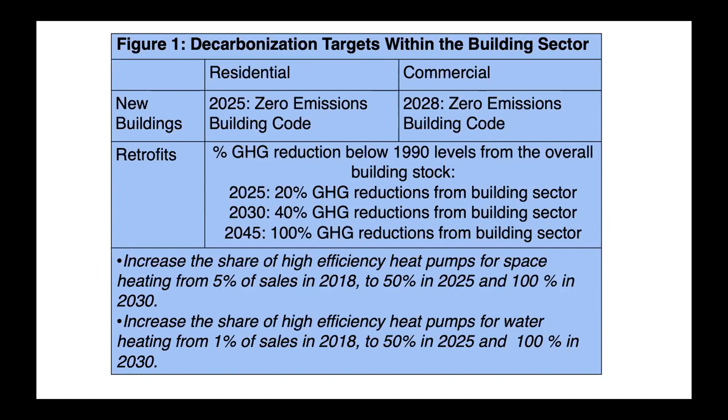We also called for a series of targets for heat pumps to move to 100% market share of sales by 2030. Below those numerical targets, we also had a series of less numerical, more driving goals that needed to be met if we were going to meet our targets. Those included increasing awareness of all stakeholders involved with building decarbonization, ensuring a good value proposition for customers and for contractors and installers, getting the supply chain up and ready to go, and aligning policies to meet all of our other goals.

This webinar series is related to that first one, increasing awareness. So we hold these webinars about every two weeks, where we bring in some of the top thinkers, disruptors, and doers within the building decarbonization space in order to present on the most recent research, products, and other activities going on.

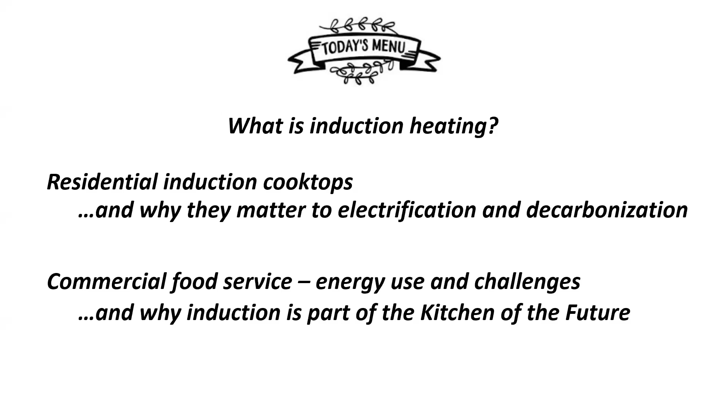Let's start with what is induction heating - I think this is important to review because it's something most people haven't come in contact with, physically seen, played with, or used. It's different from the way we have normally heated food in the past.

Here's a great graphic, thank you SMUD - I got this from Sherry Davis, who did a great poster and put this graphic together. If we look at the way a traditional gas range works, I have flames down here, some radiant heat hitting the bottom of the pan, and a lot of convective heat going up the sides, all trying to heat the pan, plus a little bit of conduction here between the elements. Basically, I am generating a field of heat and putting this cooking vessel, the pot or pan, right into that field of heat.

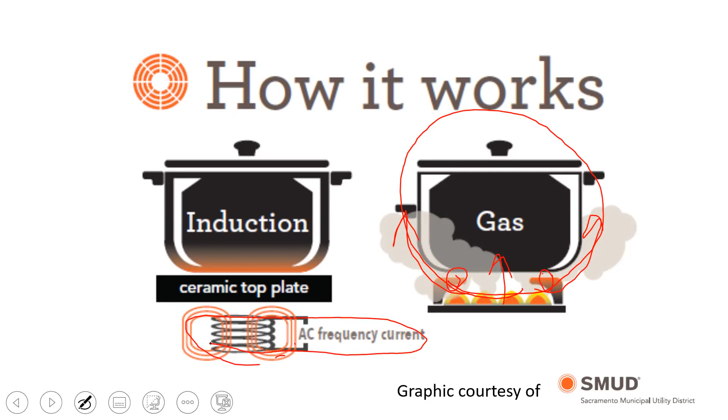Now, what we're doing with induction is we actually have a coil, a high frequency generator underneath a ceramic plate. It's isolated, and that is creating an electromagnetic field that rises above that plate. What the field is doing is interacting with the container itself, whatever the pot or pan is, and it is physically doing the heating in the pot or pan.

Okay, now I've got a lot of red lines there. But the most important thing to remember is that there is no physical heat coming off of the ceramic plate itself. I can turn on an induction cooktop all day long, have it on 11, and there will be no physical heat coming off of it. The interaction happens when I put this pot on top, and the electromagnetic field gets the electrons in that pot all excited, and they start running around and bumping into each other, and that pot heats up.

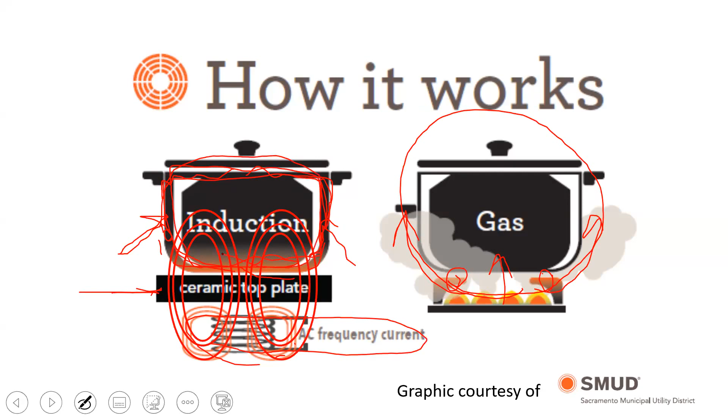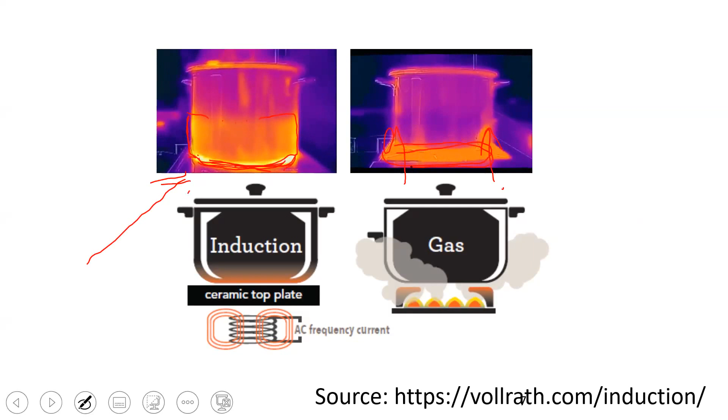Let's look at this nifty GIF from the Vollrath company, which makes commercial induction cooktops. On this side, here's the induction cooktop, and you can see how that induction field is evenly spread across the pan, with the field of highest intensity right at the bottom. Now on the gas cooktop, you can see how that convective heat comes up the side, and some of the radiant heat comes off the bottom here, heating the pot. I love this graphic.

Here's another great graphic that that Sherry at SMUD added to her poster, which we always love, once again illustrating the fact that the cooktop itself creates no heat. The heat is 100% created by the interaction of the electromagnetic field and whatever cooking container you put on top of that cooktop.

We love to do a fun demo around here. We'll have a pot of boiling water, and I'll take out a bill from my pocket—these days it tends to be like a $20 bill, I can't carry hundreds anymore, too many kids in college—and I'll physically put that bill sticking out underneath the pot as it's boiling water. People are like, 'Oh my God, you're going to destroy your $20 bill.' And then I pull it out and it's fine, because there is no heat being generated by the cooking surface, by the induction surface itself.

The surface will only ever get as hot as the pan. So if I'm boiling water at 212 degrees, then the surface will be 212 degrees. That's different from a traditional electric resistance range top or a gas range top, which has a surface temperature much, much higher. I could be boiling 212 degree water in the pan on a gas range top, but the burner itself may be at 300 or 400 degrees.

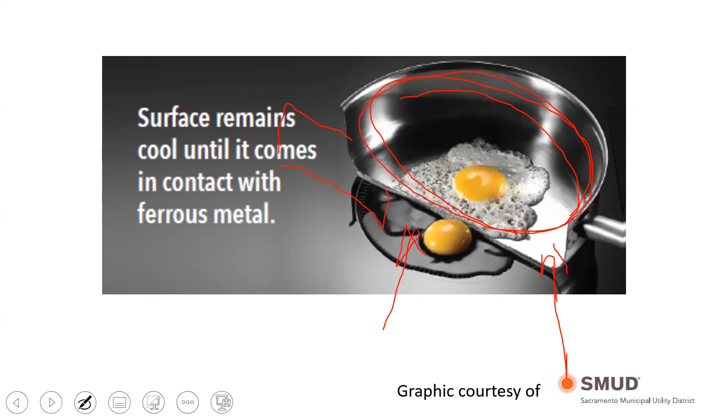Now, what are some of the benefits of induction? I'm just going to list these now because we'll come back to them in the commercial section. Basically, I'm looking at fast, flexible, modular, efficient, controllable, safer, easier to clean, and less heat released to the kitchen. We'll touch on all these things as we go along.

Now, some considerations for induction. It's a new technology, it has electronics in it, and it has a higher initial cost than what you'd pay for a standard coil electric range top, or even just an off-the-shelf gas range top. So there's a little bit of that.

And because it has electronics, will it last as long as the Wedgwood in my 100-year-old house? God knows how old my old Wedgwood gas range is—I was telling Panama I can't seem to kill it. It was probably put in in the 1950s. Would I be able to get 60, 70 years out of an induction cooktop? I'm going to say no, because it's electronics. But would I love to have the induction cooktop? Absolutely.

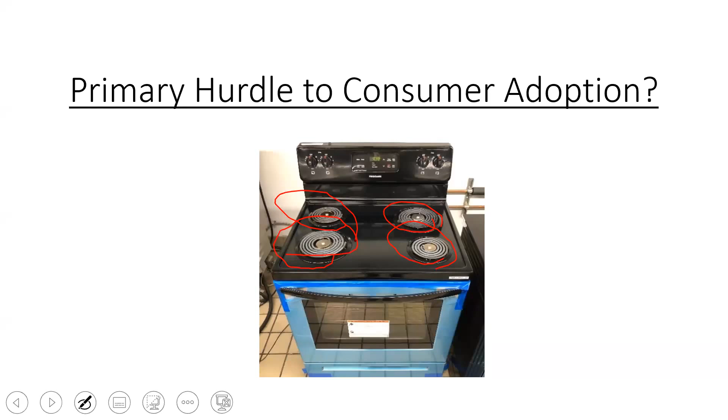It's always good to have data. That's our opinion. All right, Panama, can we move forward? We good?

Okay, so overcoming residential consumer concerns. How do we do that? We do that with science.

There was a great report funded by SMUD, thank you to SMUD, that we worked on here at Frontier Energy. Let's talk about this a little bit. The whole notion was to try and bring this equipment into the lab, get some numbers, and really see what's going on.

The report, by the way, thank you Panama and the Building Decarbonization Coalition, is posted at the same place where you registered for today's class. You can pull that report down and have a look at it.

So the notion was to get in and look at performance. The thing that I think most people care about is how the induction range top compares when it comes to heating things up. You could say, well, induction cooks your food twice as fast. What we really are looking at is production capacity and practical uses of the induction versus the gas range.

Okay, so let's look at some answers here. What do we got going? Well, on my red side here, sorry, I should be using my finger instead of my fancy pen.

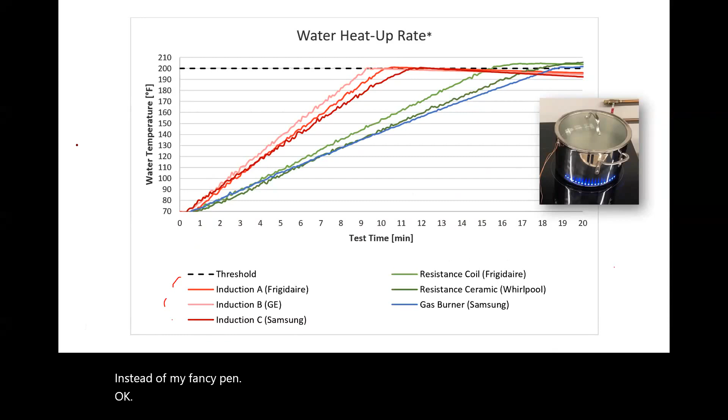Okay, oops. Okay guys, I'm having a tech morning. Let's just restart this slide here. There we go, alright, maybe I'll use, there we go.

Okay, let's see if we can make this work again. So on the left side here, I've got my induction cooktops, and I start them off at 70 degrees.

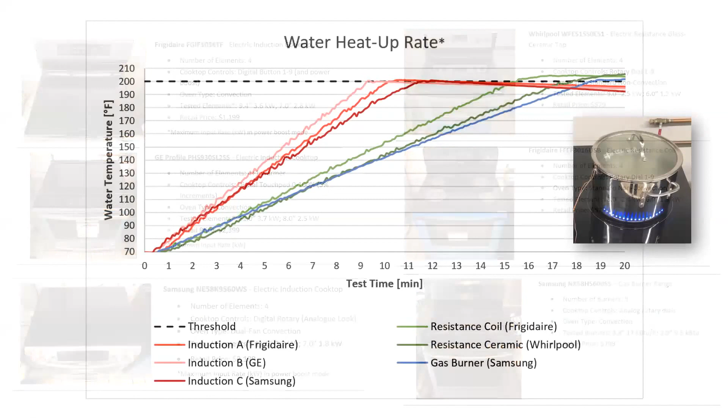Okay, there we go. Start them off at 70 degrees, and I'm up to 200 degrees right up here, somewhere around 10 minutes, an average of about 10 minutes, okay? That's great. And at that point, a couple minutes later, my water's boiling, and then I'm gonna cook my noodles. It's gonna take the same amount of time to cook my noodles in that boiling water, regardless of the type of range top I'm using. What I really care the most about is how quickly can I get that water up to temperature.

Over here in green, these guys are my electric resistance range tops, and then here's my gas burner in blue. If you look, I'm crossing the line. What I really want to compare today is my induction cooktops against my gas range top.

And here I am, and it's taken me about 18, 18 and a half minutes, something like that, to reach that 200 degrees. Last night when my very hungry kids were complaining about me not cooking dinner fast enough because I was working on this presentation, what did I want to choose? I would choose that faster 10-minute heat up rate. That's a lot of time - that's basically doubling my production. Let's look at this from a number.

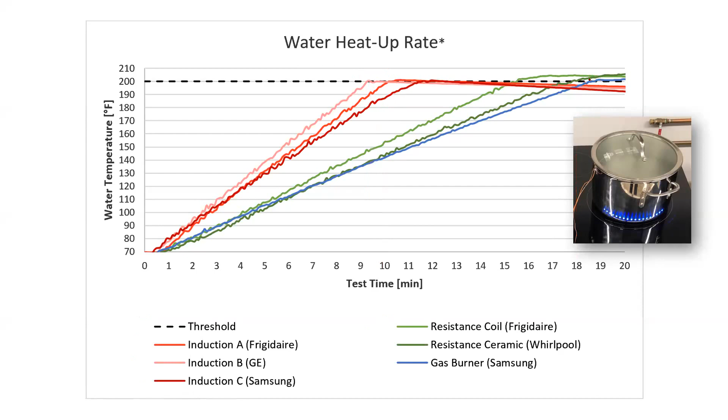And once again, I hate to show charts, but this is a great one. It's in the report, just want to show a couple of things here. So here we have all of our input rates for the various range tops. So here's my gas range top - it is at 17,000 BTU per hour. And my induction range tops here, they're all listed in kW.

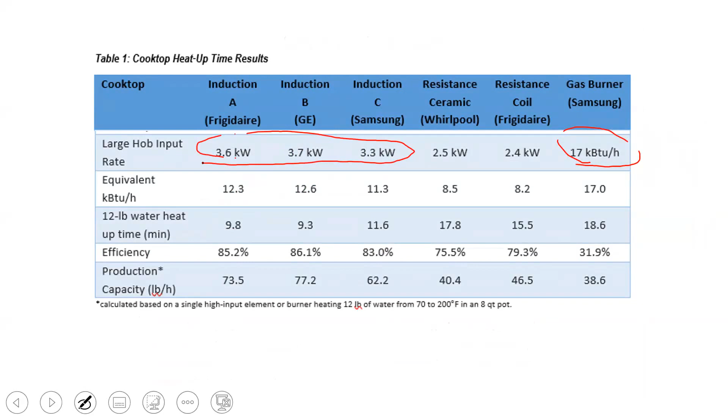So Sherry Davis over at SMUD had a great idea. She said, Richard, I would like to know equivalent BTUs. So we converted everything over to thousands of BTU per hour. Now I can compare my gas range top, 17,000 BTU per hour, to my induction, which is averaging out at about 12,000 BTU per hour. So you would say, wow Richard, there's less BTU per hour coming out of the induction. What's going on there? Wouldn't it be slower?

And in fact, here are those times. There was the heat up time for the gas at about 18 minutes. Here's the heat up time for the induction - it's averaging out at about 10 minutes. That's pretty amazing. Why is the induction moving so much faster than that gas range top?

And it really comes down to efficiency. The induction, because the induction range top is not creating any excess heat, all of the energy is really going into the pot or pan. So we have very high efficiencies up in the 80% range. Whereas with my gas range top, just by design, it's a much simpler burner design, a much simpler heat transfer, and I'm at, you know, down around 32%.

So what does that mean from a production capacity, how many pounds? Well, I've had times when I've had all my kids and all their friends over at the house, and I'm trying to really cook a lot of pasta then. What does that mean? Well, I can get 73.5 pounds of water up to temperature in an hour on my induction cooktop versus 38 pounds per hour. That just lays it out - there's a lot more capacity in that induction cooktop.

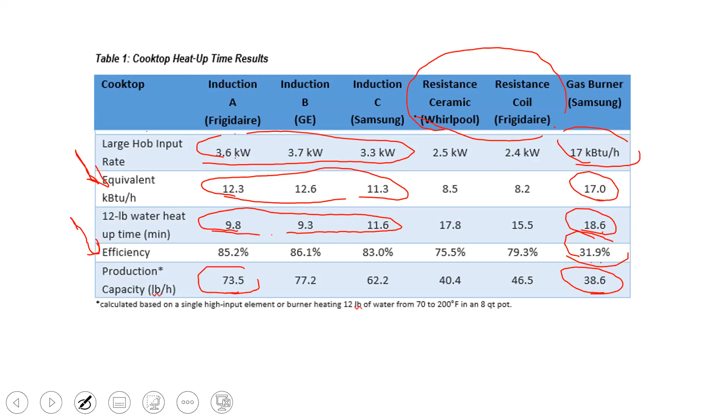Now I want to point out one other important thing. If you look at our traditional resistance coil cooktops, you'll notice that they have elements rated in the 2.5 to 2.4, or around 2.5 kW, okay? How come I can get these induction elements so much higher, the induction hob so much higher? I think this is a really important feature that we need to pay attention to with really good residential induction cooktops. The beauty of the induction cooktops is they have electronics and computer control.

They're smart appliances, and each one of the ones that we tested actually had a power boost mode or high input rate mode. So those three hobs can actually go up to a much higher kW. And that's really brilliant, because what it means is that I can put as much energy as possible into those bigger hobs, and really get a lot of water heated up without having to put a much bigger electrical panel on the side of my house. In other words, I could replace these resistance range tops with the induction range top and put it on the same exact circuit.

Now, so then you're going to be like, well Richard, these induction range tops have higher ratings - what happens when you turn them all on? Isn't that going to overload the circuit?

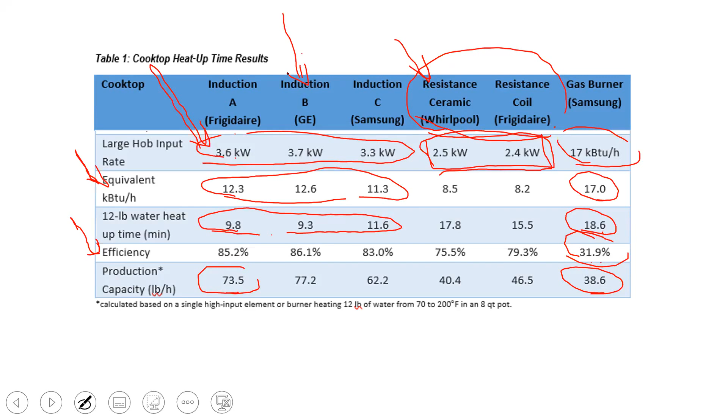The beauty of induction range tops is that as you turn on more of the induction hobs on those units, they communicate that another one is coming on, and they start to back down their power so the range top still stays within its breaker rating, its current rating. It's something you cannot do with a regular resistance coil range top, and I think it's a huge feature on these nice induction cooktops.

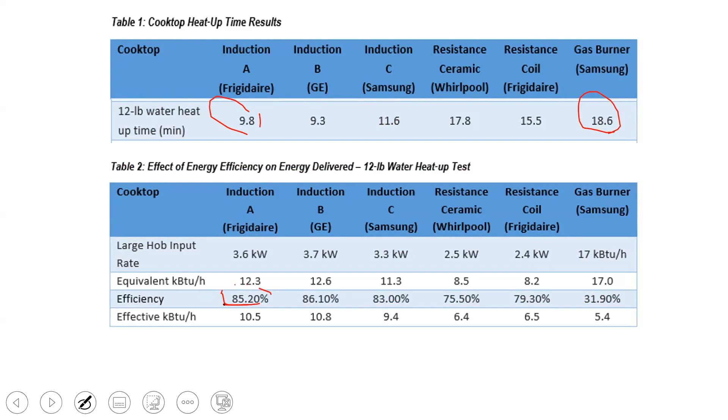Okay, let's look over here. Once again, I've got my chart. We've got our heat up times, 18 minutes, 9 minutes, and then we get down to our efficiencies. Remember, I got that much faster heat up time because I had 85% efficiency versus 30% efficiency.

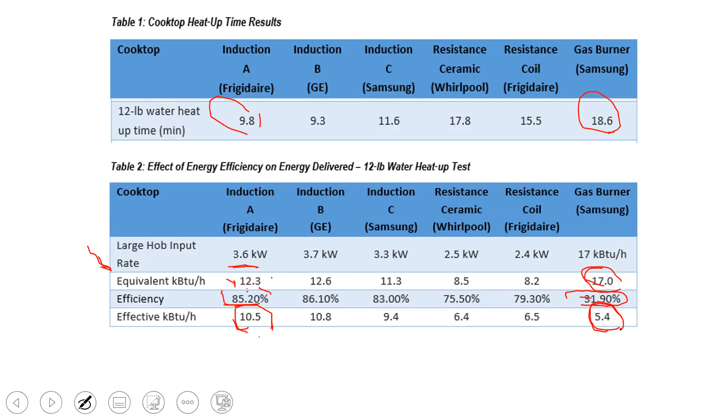Sherry at SMUD was like, Richard, what's the theory there? Tell me what's going on. So we said, let's go back to our equivalent BTUs. My induction range top, take this first example, has an equivalent BTU of about 12.3. When I multiply that times my 85% efficiency, I get an effective BTU delivered to the water of about 10,000 BTU per hour. On my gas range top, I have that much higher 17,000 BTU per hour coming through the burner, but my efficiency is only 30%, and I end up with an effective energy delivered to the water of about 5,000 BTU per hour. So that explains what's going on. It really comes down to the ability of the induction range top to effectively deliver heat where it's needed.

Okay, let's move on to my next story. You know about me making pasta for the kids, all that good stuff. Lately my wife and I have also been doing something with our beautiful fig tree out in the backyard—we live in Oakland, the greatest city on the planet, thank you very much. We've figured out we can make fig preserves that will take us all the way through the winter, so we've been learning how to do preserves.

So one day we were doing them on our gas range in the house, but another time we took all our fixings and went out to my mother-in-law's house, who has a resistance ceramic electric range. We started making the jam out there, and damned if we didn't burn it. The bottom of the pan was scorched, and I'm such a careful guy, so I wondered what happened there.

What happened is that when you turn off the heat on an induction range top, or on a regular gas range top, the heat's off—there's a little residual heat, but it basically stops inputting any extra heat, and you have some controllability. On those traditional resistance range tops, particularly ones with a ceramic top, they build up a lot of stored heat in the coil or the glass cooktop, and they actually overshoot that temperature.

In our test, when we were taking the water up to 200 degrees, we would turn off the cooktop at 200 degrees and then see how much the temperature continued to rise. Here's why I burned the jam: on that ceramic cooktop, the temperature rose another 7 degrees. Anybody who's made jam knows you have to really keep an eye on that final temperature—you don't want it to scorch. It's a time and temperature kind of deal. And the other problem was, not only does it go 7 degrees above temperature, it takes a long time to give up that residual heat. There's like 38 minutes that it will sit above 190 degrees.

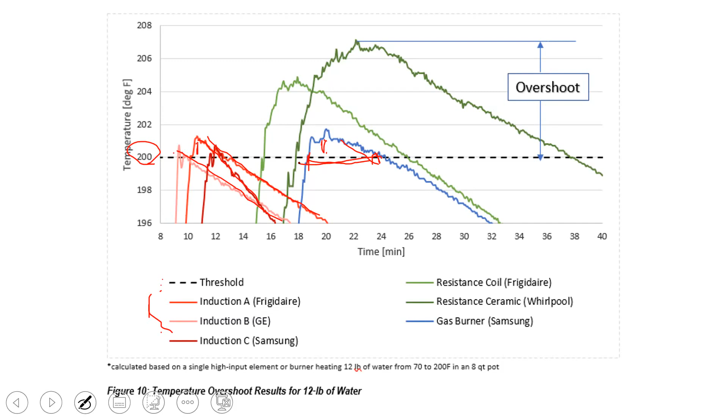Check it out, here's the one I was just talking about, that resistance cooktop. You can see my overshoot, it really goes up pretty far, and then it stays up there for a long time. It's above 200 degrees for a long time. In our test, we waited for it to get all the way down to 190, and that's where it took that 38 minutes.

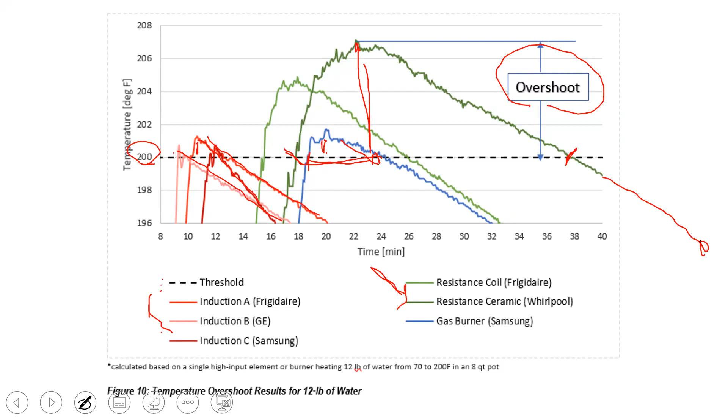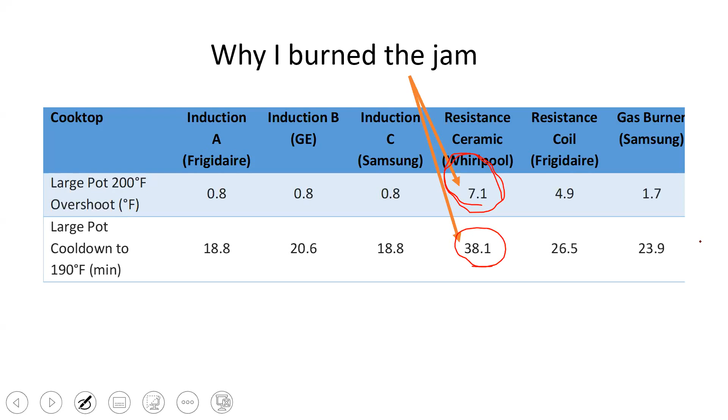That's one of those performance issues that makes induction great. Now there's another part of this that's pretty important, the safety aspect. If something stays hot for 38 minutes, you're saying, hey kids, stay away, don't put a rag on it, don't put your hand down on it. There's just that chance somebody's going to walk up and get burned. Whereas the induction is back down to temperature pretty quickly. So I just put that in as an extra benefit.

Now, how do we get people to understand all of this stuff? Because I can talk theory all day and show you charts, and right about now you're having your second espresso, thinking why did they get an engineer to talk about this? What we need is hands-on. Hands-on changes hearts and minds.

I think this is our goal. Ultimately we have to get people hands-on using this equipment. This is what's going to change hearts and minds above everything else we try to do. I know a lot of people on the line, a lot of people we're working with, are doing loaner programs, and I think they're great because that gets people understanding this induction technology is different, it actually works, and it's very simple to clean. It's all great stuff.

But the thing I want to continue to point out is that this little loaner single hob induction cooktop is way different from that very nice, full-on range top that we did our test on, primarily because the little loaner does not have that power boost unit, and it's limited by the current that can come in. It also may have a fan on it that makes it a little bit noisy, that's one of the complaints people have talked to me about, they can hear it, whereas the big range also has heat control but it's spread out, you're not hearing it, it's not so focused.

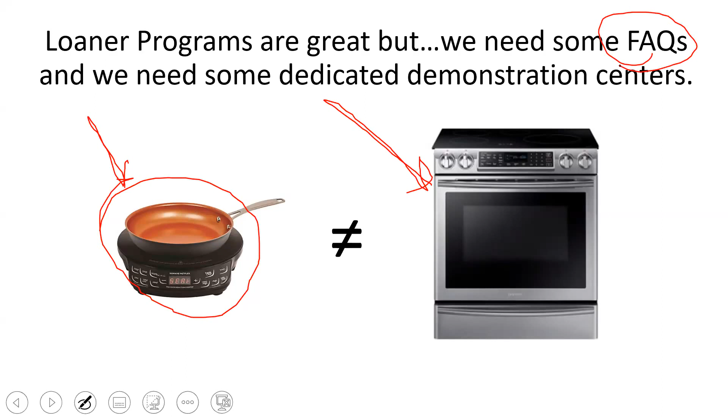So I think what we need to do for these loaner programs, here's another invitation, we need to create some FAQs. As we loan these things out, I think we need to be telling people, hey, this is just a little taste, but you guys really should come in and try the bigger stuff.

I also want to talk about this for a moment. We need to get on point about why induction range tops are crucial to decarbonization. There's some articles saying, hey, it's just great, great for you, performance, blah blah blah. But I think what we really need to do is go back, and I went back and looked at the New York Times article. It was an interesting article that got a lot of negative comments, sadly, from readers, like 700 comments, and about 500 were negative. But I think that's because people didn't really read a couple of the important lines in there, and I think we as promoters of the technology need to pay attention to this.

So here's one of the lines: nobody is going to shed a tear about having to switch to a more efficient furnace or water heater, but people feel emotional about gas stoves.

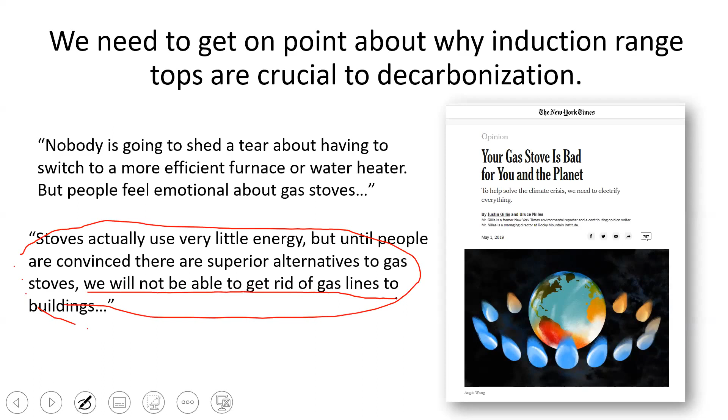Stoves actually use very little energy, but until people are convinced there are superior alternatives to gas stoves, we will not be able to get rid of gas lines to buildings. This is the core, right? We're really trying to change hearts and minds so that you could get rid of that gas line to the building. So I just want to pitch that out there.

I think we need to really make sure that we're on point as we do our communications. I've seen a couple of communications that actually produce more blowback from consumers than positive movement.

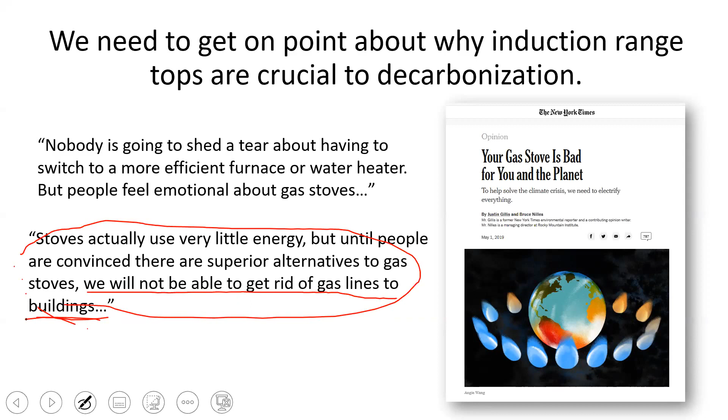I also want to say I think we need to sell induction range tops in the same way as people sold smartphones. I'm old enough to remember when I had one big black phone that sat in the house tied to the wall, and now I've got this incredible computer in my pocket, and I think that's where we need to go. We need to tell people, hey, the induction cooktop is like your smartphone. It does amazing things that the old, 19th century technology doesn't do.

So let's talk a little bit about commercial food service, which is near and dear to our hearts. And we want to talk a moment about energy use intensity. Why do we care about food service?

So this is thousands of BTU per square foot. Let's fire up my pen again here. There we go. I'm sorry guys, I have a new computer and I'm still getting used to the touch screen and all the fun stuff I can do. It's slightly different from my last one, so I'll blame my faux pas on still learning the technology.

Okay, so anyway, here we are. We're talking about thousands of BTU per square foot. That's an energy use intensity number. Any of you energy experts out there deal with this all the time. If you look at commercial food service, it's running at about 350 kBTU per square foot. Okay, here's my restaurant over here.

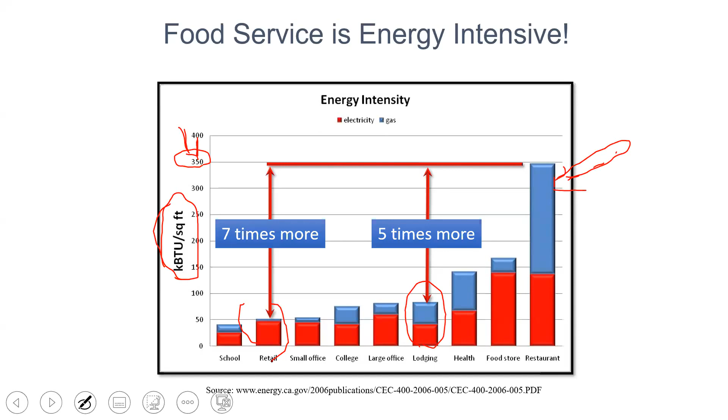Now that's an average number for food service. You compare that against a hotel, it's 5 times more. Against normal retail, it's 7 times more. If this restaurant is a quick service restaurant or anything with more kitchen to it, that 350 energy use intensity number goes way up, okay?

What that means is that you're driving down the street and you see a McDonald's next to a Best Buy, and your brain is going to say, hey, that Best Buy uses a lot more energy, and in fact, they could be using the same amount of energy. They could have the same energy bill.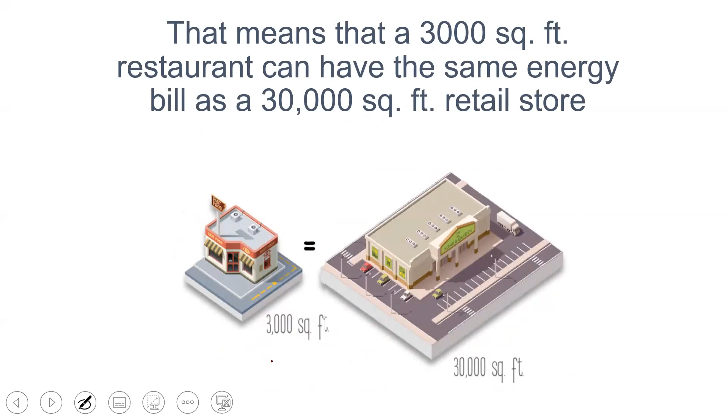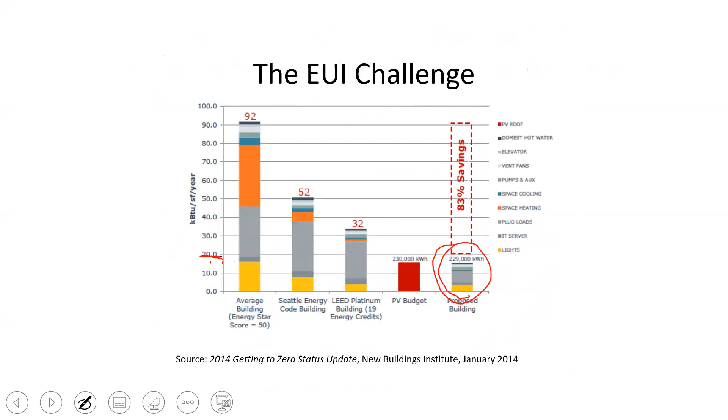What does this say for us when it comes down to green building stuff? Well, let's say we were going to try to get to a zero net energy building like the Bullitt building here, and now we're trying to get down into 18 kBTU per square foot, okay? I wonder if I can do that in food service.

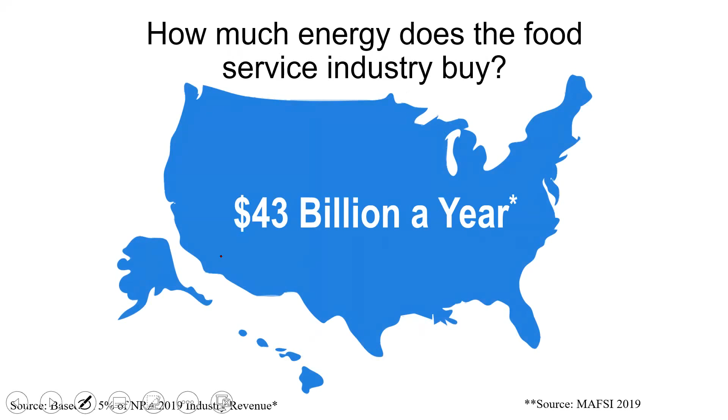From a cost standpoint, commercial food service operators are buying about $43 billion worth of energy a year. Compare that to all of the equipment supply, tabletop, furniture, everything, that's about $13 billion a year. So the energy bill is way more than all of the stuff you see when you walk into a restaurant, all the hardware. It's a big energy bill.

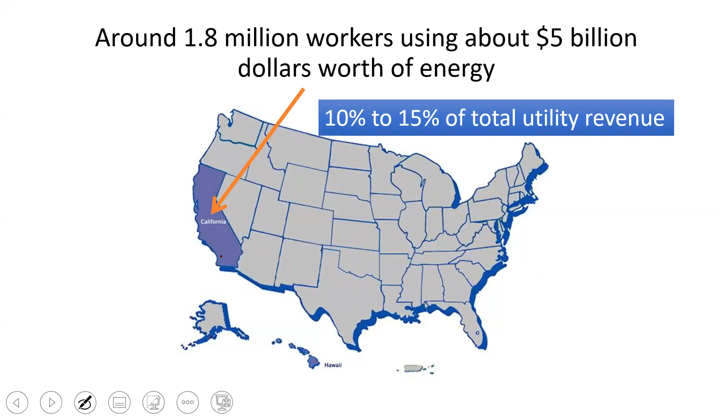In California, that's about $5 billion worth of energy, and it's 10 to 15% of the total utility revenue. Any utility people on the line out there? I'm just going to repeat that, okay? Your commercial food service customers are 10 to 15% of your total utility revenue. And so it's very important to look at this market and take care of this customer segment.

From a social standpoint, about 10% of the US workforce is in commercial food service. And basically, everybody's touched by food service every day, okay?

And there's some major challenges facing our food service operators right now. Probably labor being the biggest one. Anybody in the Bay Area knows that every restaurant's got a sign on the door saying, hey, help wanted, or lots of them are closing because they can't get enough people.

Real estate, the cost of real estate is way up. We need to do ever more cooking in ever smaller spaces. The kitchen environment is pretty brutal. Nobody necessarily enjoys working in high temperature situations, and there are actually some new heat stress regulations coming down the line. And then of course, electrification, decarbonization, that's sort of confusing to people, and it could actually change the amount of money that it costs to operate a restaurant.

The good news is induction is definitely a solution to some of these challenges. And so now let's get into that. What are some of the things? Well, induction is fast. Hey, that helps with the labor. It's flexible. I can put it in all different kinds of situations, so I can build a smaller kitchen. It's modular. I can just install as much induction as I want.

Highly efficient, that helps to lower my bills. It's very controllable, that helps to cut my food waste. It's way safer. It's also easier to clean, so that keeps my workers' comp down. It keeps my employee safety up. And at the end of the night, you wipe the thing down and you're not taking it all apart and trying to clean up burners. And there's less heat released to the kitchen as well.

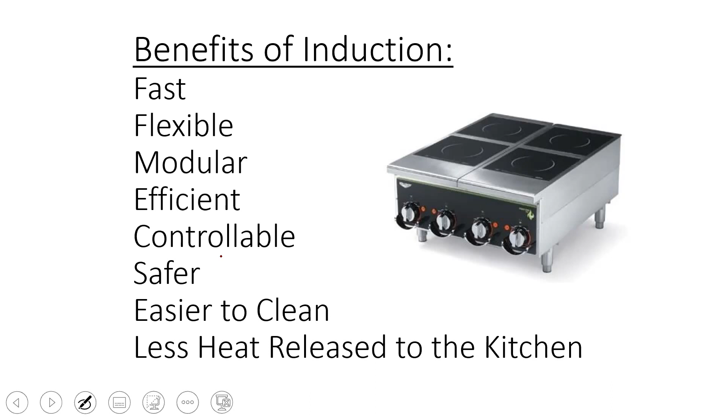There's a lot of different form factors in induction these days, which is great. These are some of the ones we've had in the lab, and lots of interesting stuff, like their tabletop units, their standalone units, their drop-in units, their stock pot ranges now.

And then there's woks, and this was one of the questions somebody just asked. Let's go back 25 years to some energy work we did on some woks. This one, that's a 5 kW induction wok right there. 5 kW induction wok, with very high efficiency, and I can produce 117 pounds per hour of food. Here's the traditional wok, and its efficiency is so low that it's producing about 124 pounds per hour. These guys are pretty close, right? Even though in size they're way different.

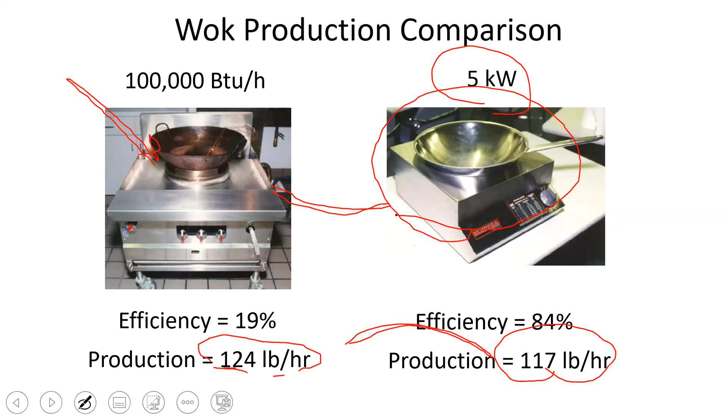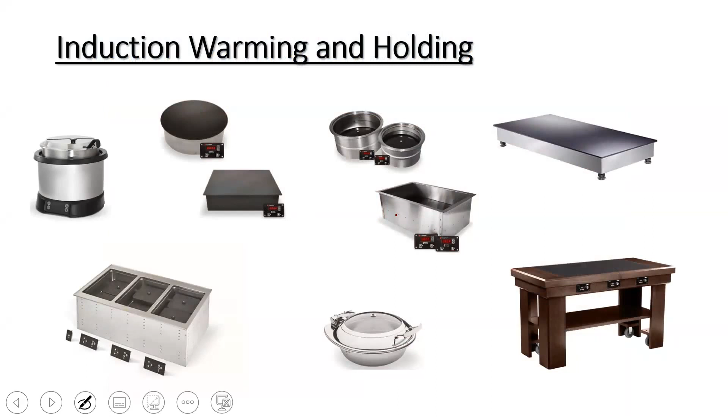So what's been the challenge of these woks? People will say, well, that's not a true Chinese wok. It doesn't look like something they would use in China. Amazingly enough, I did see these in China when I was over there, but I can understand that. I can understand people saying they really want an induction wok to look like a real wok. Well, hey, good news. At the National Restaurant Association show this year, they were showing off a full-on Chinese wok, so it's coming to the U.S. market. And then on top of that, there's all kinds of cool gizmos you can get for warming and holding and all this good stuff.

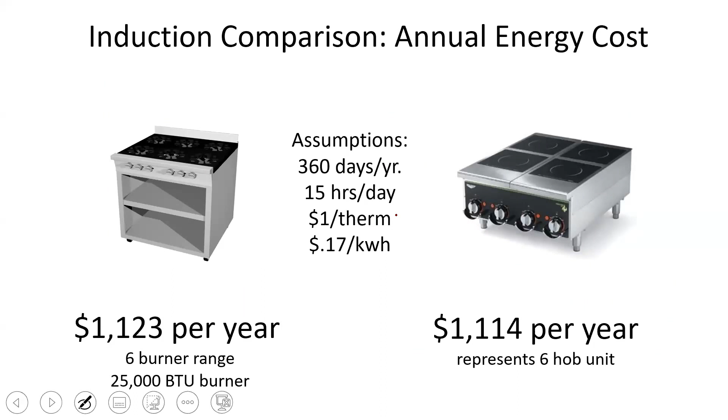So let's do a quick comparison of a couple of range tops. Here's a gas range top from a case study that we did, and we did a cost analysis, and that was about $1,000 a year to operate. And the same size, the 6-burner induction, would also be about $1,000 a year to operate. So no big cost increase to go all electric with induction, which is great. That's not true for every appliance, but that does work for the induction range top.

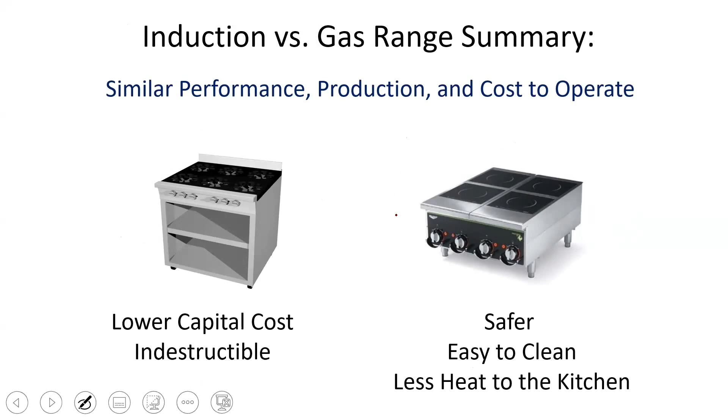So what are some of the benefits? Well, if I'm looking at a gas range top, what are the benefits with that? It's a lower capital cost, and it is indestructible. Somebody asked me one time, how long will a commercial gas range top last? And I said, 1,000 years. But on the plus side of the induction, it is, once again, safer, easier to clean, and less heat to the kitchen. It cuts some of that heat out, which is really important.

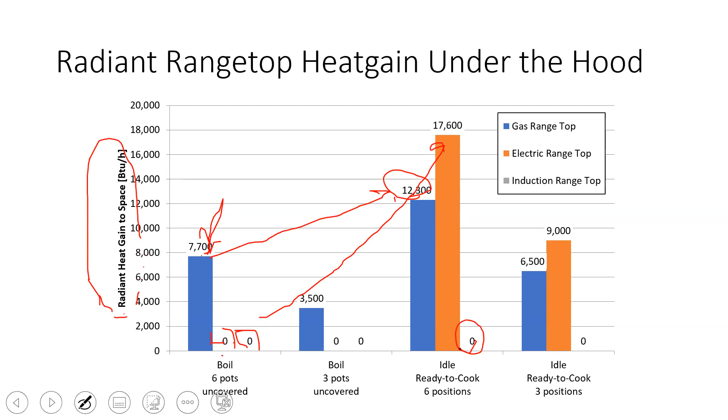Now, here's the interesting thing. If I take the water off and I just have the burners turned on - everybody's probably been to a restaurant and seen a gas range with all the burners turned on - I have this much radiant heat gain in the space. It actually goes up. And if I take the pots off of the electric one, look at that. It goes from 0 way high up to 17,000 BTU per hour. But look at there, the induction, of course, still stays at 0 heat gain, because when I take the pots off the induction cooktop, it uses no energy, it produces no heat. So once again, ancillary benefits.

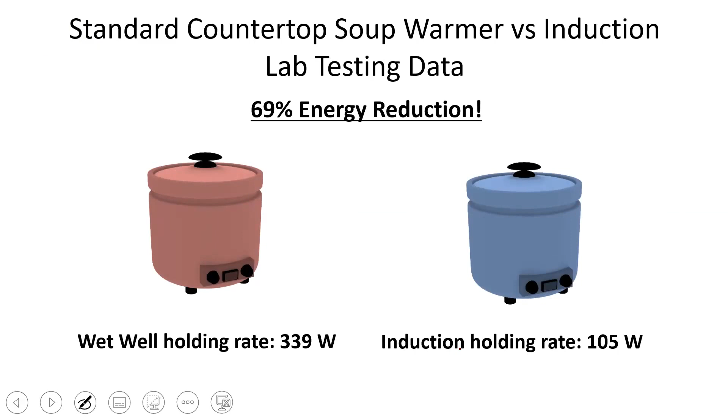Let's look at a couple of pieces of equipment, data that came out of a CEC study. We looked at soup warmers. In the lab, we saw a 69% energy reduction for induction soup warmers. In the field, we were seeing 64%, right?

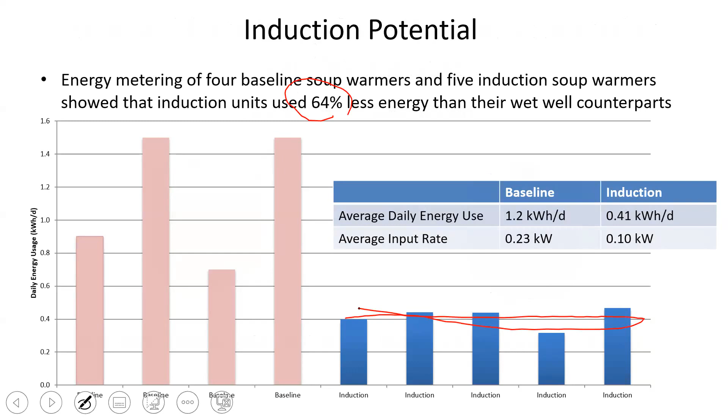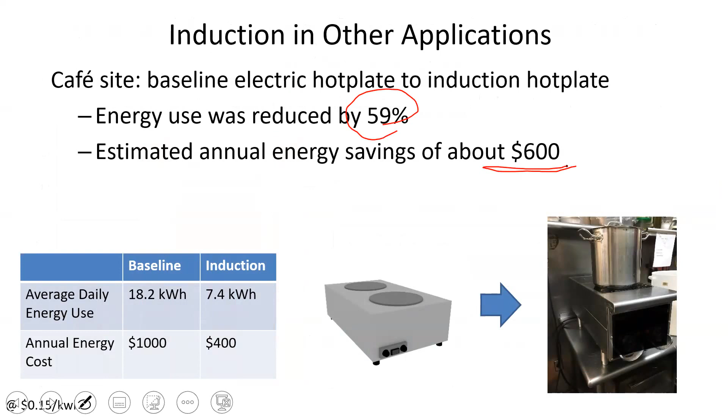Here is a little restaurant in Oakland where we replaced a hot plate with an induction unit, cut energy use by 59%. That was savings to this small business of $600 a year, which I guarantee you is a lot. We always ask chefs, what could you do with $600 a year?

Here's some not so good news I want to pitch in, a little sidebar about going all electric. Electric appliances can cost significantly more to operate, so we need to design smart in order to achieve decarbonization.

This is an invitation to anybody out there doing a job to come contact us at the Food Service Technology Center, work with us on the front end. If you do a one-for-one replacement of gas with electric, you're going to end up with higher utility bills. This is also an invitation for folks in the municipal sector working on codes and laws. We need to look specifically at food service and make sure you do not negatively impact your food service customers.

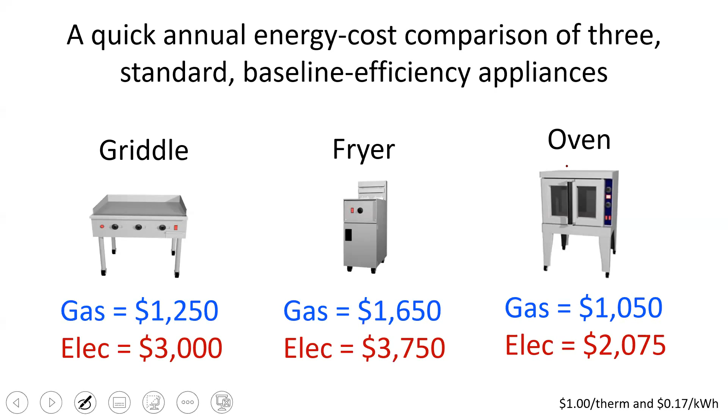The way around that is to design smart so we need less equipment, and lower the overall energy use of the entire facility. That could be looking at your hot water systems, your kitchen ventilation, making your kitchen smaller. Ultimately, this is what we're trying to do.

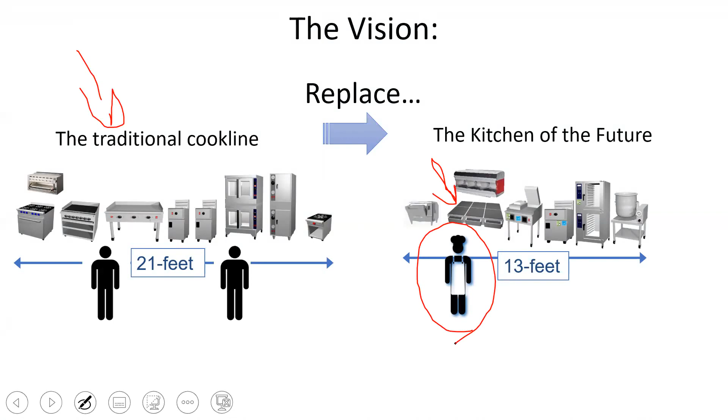We're trying to replace a really big traditional cook line where you've got one of everything and a bunch of low-paid staff working on it. We want to move to a much smaller cook line that uses a lot of high-tech equipment like the induction cooktop, and has highly paid, highly trained professionals running all the equipment. That's one of our big visions and goals here at the Food Service Technology Center.

Now, the tools to get it done. How are we going to change hearts and minds? Do we have this in our hands? Well, we do. Here at the center we have a demonstration facility where we can bring people in and get hands-on.

I know people are doing loaner programs for residential. I think in residential we really need to set up some centers where we can set up real residential ranges and have people come in and work with a chef.

This guy right here, Mark Dusler, is our consulting chef. He knows his stuff, he's really excellent. The quality of food and eating around this lab has gone up tremendously since Mark has been here. And it does not cost PG&E customers a penny to come in and demo this equipment.

So let me give you a great example of how that worked. Peter Turnbull over at PG&E, a friend of ours for many years, said to Panama, 'you need to go out and meet these guys at the Food Service Technology Center.' Panama came out, we sat down together, we hit it off wonderfully, and shortly thereafter Panama told a sustainability manager in Fremont, 'you need to talk to these guys at the Food Service Technology Center.' It just so happened they were trying to build a senior center, and trying to get their chef to consider induction cooking, electrification, and high efficiency equipment.

The chef came out, worked with Mark Dusler, tried out some equipment, and this is what he said after getting his hands on it: 'After the presentation and testing some of the equipment, I am confident that they are just as good or better than conventional cooking equipment. I am and would be a happy chef using more energy efficient appliances.'